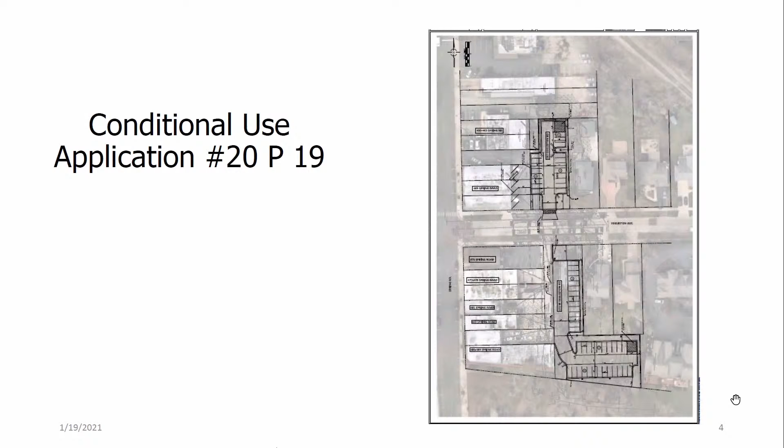This application involves Roberto's Ristorante and Pizzeria for a parking lot behind. They also own the multi-tenant office building and retail building at the opposite corner and are seeking a conditional use for parking lots behind that building as well. This is conditional use application number 20P19. You can see the two parking lots that we propose, as well as the relationship of those parking lots to the buildings on the frontage.

For the record, we've made sure that our address is in there as well as our logo. The ownership of the properties has been depicted in detail. They are color coded. These are multiple LLCs that are owned by the Moreci family, but everything there in the color code is a Moreci parcel of property. You can see that the two parking lots also involve multiple different zoning districts as well.

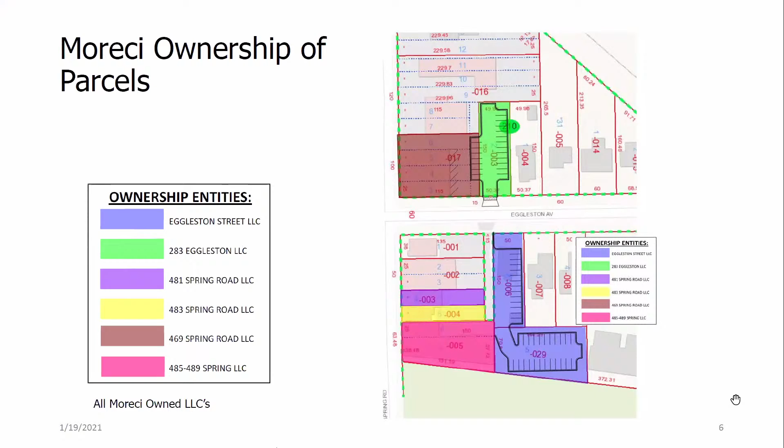This is a conditional use request. The applicant is requesting two separate yet directly related conditional uses. The requested conditional uses would permit applicant to construct and operate two surface parking lots immediately adjacent to two commercial buildings having frontage on Spring Road. Both of the parking lots to be constructed, as well as the commercial properties with frontage on Spring Road, are owned by the Moreci family.

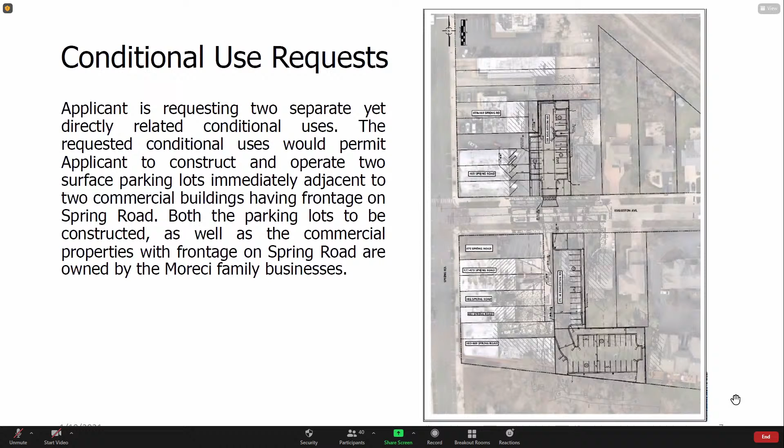The conditional use requests do not require any change in the zoning, nor do they require any variation or relief from any of the bulk regulations for any of the zoning districts involved. Rather, these conditional uses for parking lots are expressly permitted in each of the zoning districts established by the City of Elmhurst under section 22.242(3)A. We've cited that in full, but the relevant part is bolded, and it essentially says that parking spaces to serve office, commercial, or industrial buildings or uses may be located within 300 feet of such use if such spaces are located in an office, commercial, or industrial district, or are located in a residence district on a lot which abuts the office, commercial, or industrial district.

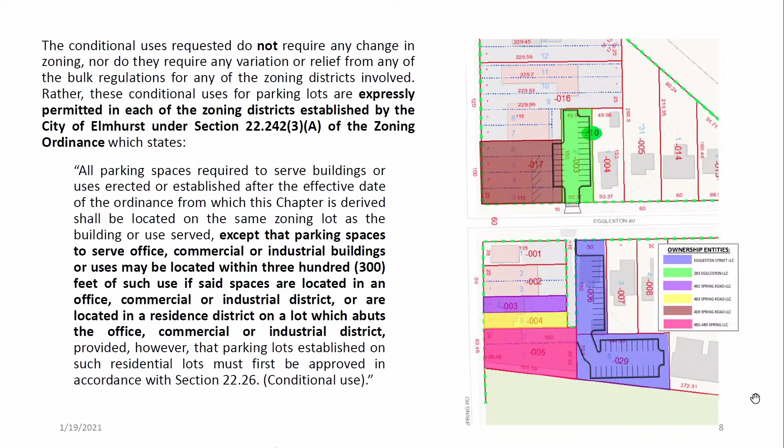And in this case, we have to file for a conditional use. This is a particular type of zoning. The distance that we are involved from each of the buildings has been measured, and this document has been provided to the city staff to be clear that we comply with this particular regulation. And since these are conditional uses, they are actually acknowledged as being permitted within the zoning districts assigned by the City of Elmhurst. Illinois case law of the Supreme Court holds that this fact constitutes a legislative finding that surface parking lots are an appropriate or compatible use adjacent to the single-family homes if they can fulfill the conditional use standards.

From a disclosure standpoint, the north parking lot is made up of two distinct lots. The main lot is lot 2 from a residential subdivision. There used to be a house on that approximately two decades ago that was demolished. Connected to that is a vacated 15-foot wide alley that the Moreci family purchased from the city several years back. Those lots, if we get the conditional use for this particular parking lot, will be consolidated, and the consolidation plat will be filed and recorded with the City of Elmhurst.

Similarly, the south lot is made up of two separate lots. Lot number 2 to the north currently has an old house on it that's been vacant for some time. And the southerly portion of the south parking lot is made up of part of what was once lot 8. Those two parcels will similarly be consolidated. We are not owners of the public alley that's adjacent to this particular parking lot, so that is not part of the consolidation plat.

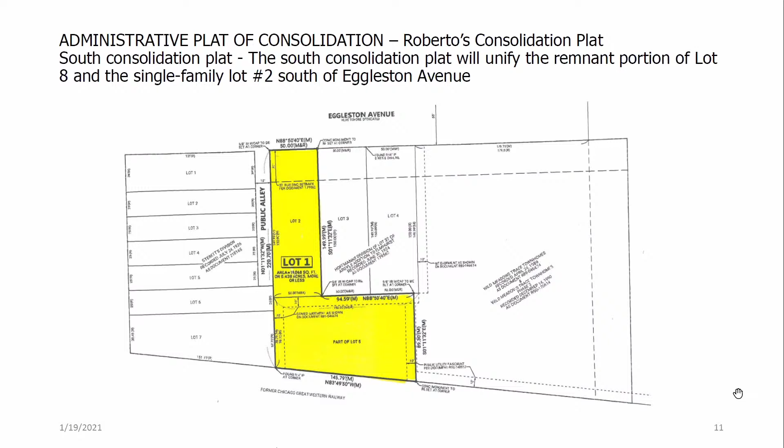Consolidation plats are a little bit different. These will be processed in a little different procedure. These consolidation plats will merge the currently separate lots of record into a single lot of record for each parking lot. This process is known as consolidation. This consolidation, because the lots are small, is done by an administrative process. Under the city code, consolidations that are less than an acre do not require a public hearing or a public meeting of the Plan Commission. These consolidation plats will be processed administratively by the city planning and zoning officials to make sure that we comply with all of the regulations. These consolidation plats do not require consideration or deliberation of the Planning and Zoning Commission this evening.

Our team is made up of many disciplines. Roberto's Restaurant is the owner of the property. They are the operator and main user of these two parking lots. Spaceco is our consulting and engineering consultant for this particular project.

They have done the site work and the layout, and they have also done the stormwater engineering. Bernanke and Associates completed the photometric study for this particular project to make sure that our lighting standards would meet all of the codes and would not leak over the property lines in excess of that which is permitted.

And KLOA, as our traffic and parking engineering firm, they have studied the area for parking deficiencies, and they have prepared and completed the traffic report as well as the supplement. Our firm name is listed as well.

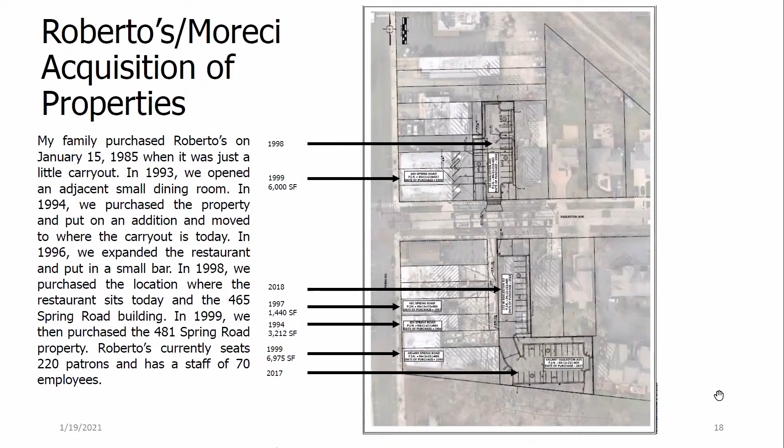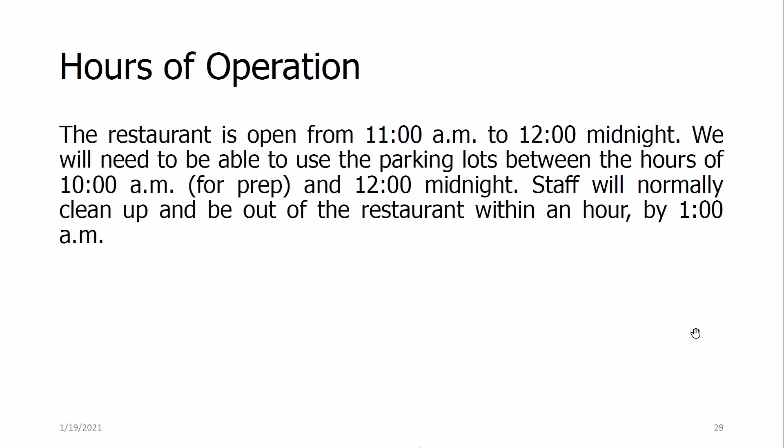Hours of operation - go ahead, Pasquale, if you'll address this. Sure, the hours of operation are open from 11 a.m. to 12 midnight. We will need to be able to use the parking lots between the hours of 10 a.m. for prep until 12 o'clock midnight. Staff will normally clean up and be out of the restaurant within an hour, by 1 a.m. if need be.

Roberto's and other business owners in the area are in great need of additional parking along Spring Road, especially north of the Prairie Path Lane. We have been urging the city to create more parking for years to make it more efficient and convenient for the patrons and businesses along Spring Road.

Addressing all legal and engineering requirements and the concerns of the neighbors has been incredibly expensive for my family, and it is occurring in an unprecedented and difficult year within the restaurant industry due to the COVID-19 pandemic. We desperately need parking to serve the needs of our customers, and on behalf of my family, we simply want this to be done in a transparent, professionally designed fashion without cutting corners.

Thank you, Pasquale. At this time, I would like to introduce our professional engineer from Spaceco. His name is Michael Mondas. We previously submitted information regarding his address and location. Mr. Mondas, would you please take it away with your testimony?

Yes, thank you, Scott. As Scott introduced, my name is Michael Mondas. I'm a principal with Spaceco Incorporated. I received a Bachelor of Science degree in Civil Engineering from Bradley University. I am a registered professional engineer in the state of Illinois and three other states that surround Illinois. I'm also a certified floodplain manager, and I have over 27 years of experience in site development engineering.

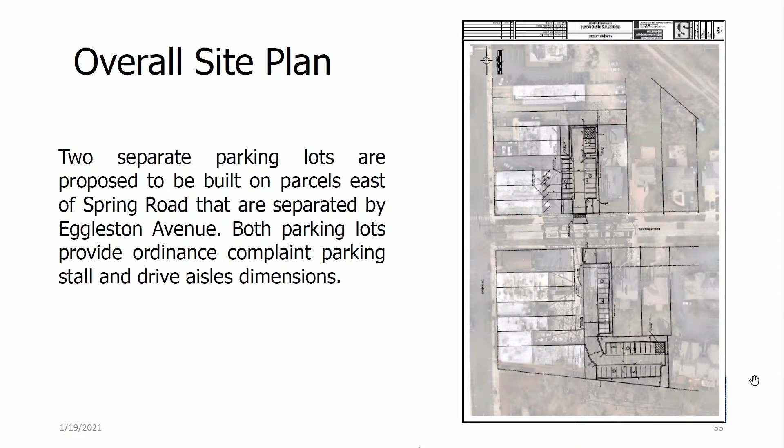Also, the drive aisle at the back of the building to the west will be reconfigured so that it is one-way, east off of Spring and south behind the building, and the parking stalls behind that facility will be angled. No setback from this parking lot to the property along the west property line, where it abuts the existing driveway behind the building, is being provided.

Fencing is also proposed along the east and north sides of the parking lot. It should also be noted that this layout represents a reduction of one parking stall from the initial site plan that was submitted back in October.

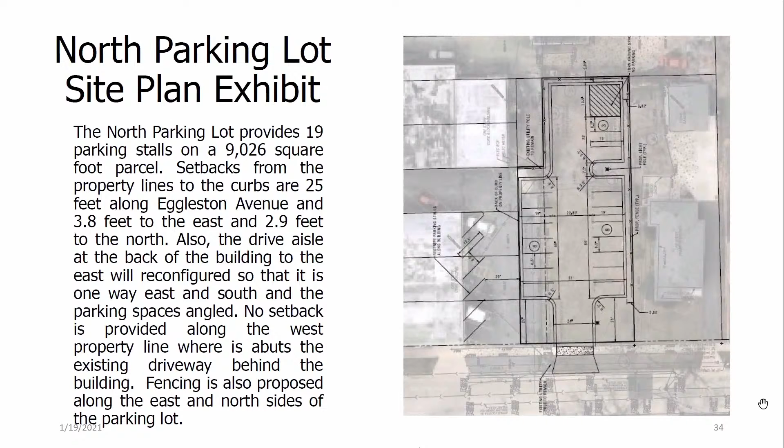This stall was given up to provide a space at the north end of the lot so that cars could turn around if they entered off of Eggleston and there were no spaces to park. They had the ability to do a turnaround at the north end of the lot.

Setbacks from the property lines to the proposed curbs along Eggleston are 25 feet, 5 feet to the east property line, and 10 foot to the north property line where this parcel abuts the rear of the existing houses to the east. The setbacks vary from 2.2 feet to 16.24 or 16.4 feet to the south where the parcel abuts the Prairie path. The parking lot directly abuts the existing alley to the west that's behind the current restaurant.

Fencing is also proposed along the east side of the lot and on the north side adjacent to the rear of the existing houses. The south parking lot is also provided an accommodation for a possible bike rack in the front setback along Eggleston. As with the north lot, the south lot also has a reduction of one parking space from the initial site plan that was provided, again, for a turnaround at the far east end of this lot.

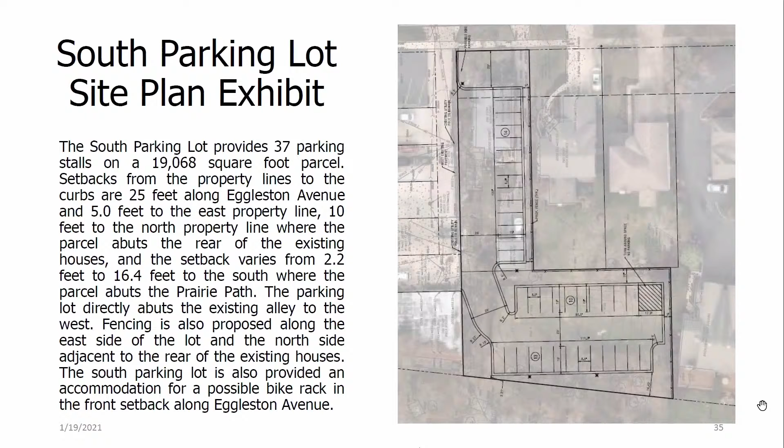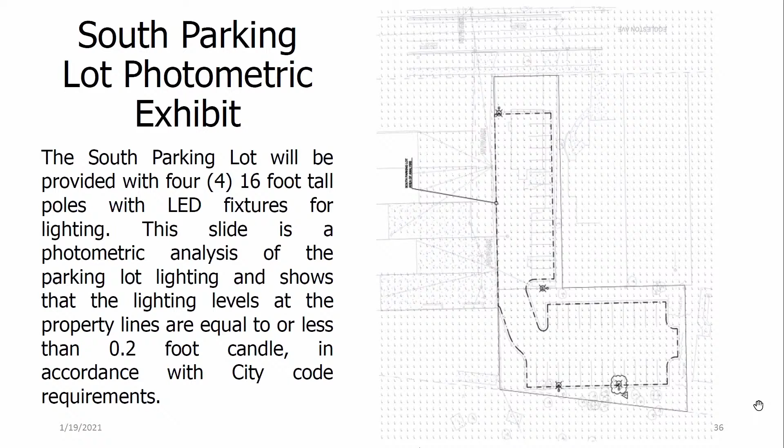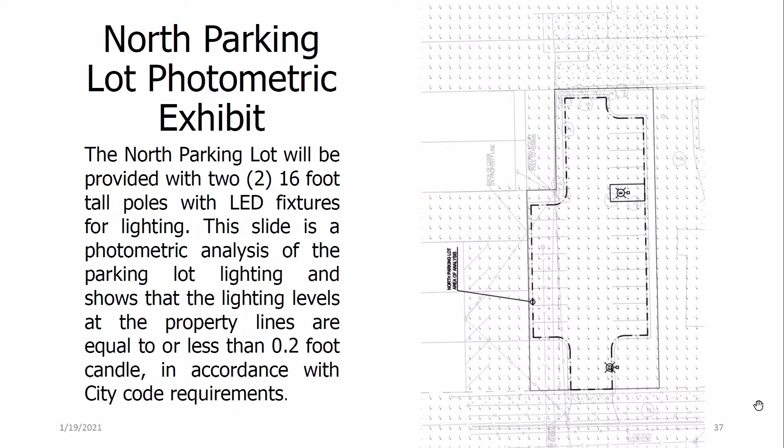This is, again, the photometric analysis for the north parking lot. Similar to the south, we have 16-foot tall poles, 2 of them with LED fixtures, again, representing that we have 0.2-foot candles at the property line in accordance with city code requirements. Next slide.

This slide shows the ordinance required setbacks for the north parking lot per the zoning ordinance. It's noted that the side and rear yard encroachments where the pavement of the parking lot encroaches into those setbacks where it's proposed, but those encroachments are allowed per the zoning code. The front setback along Eggleston Avenue is provided, which is 25 feet. Next slide.

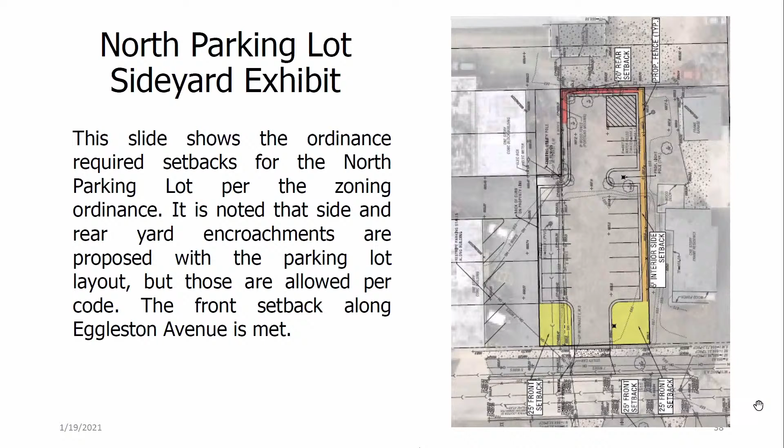This is again the south parking lot, shows the ordinance required setbacks for the south parking lot per the zoning ordinance. Again, all the setbacks are met with the proposed parking lot except the rear setback, and again that encroachment is allowed per code. Next slide.

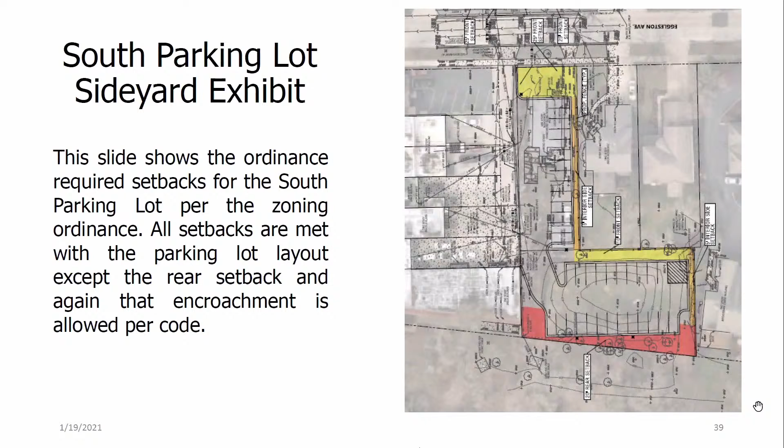The remaining portions of the lot will be paved with asphalt and concrete curbs. The proposed lot coverage percentage for the north lot is approximately 56%, and the south lot is approximately 35%, well below the 60% maximum that is allowed by code. Next slide.

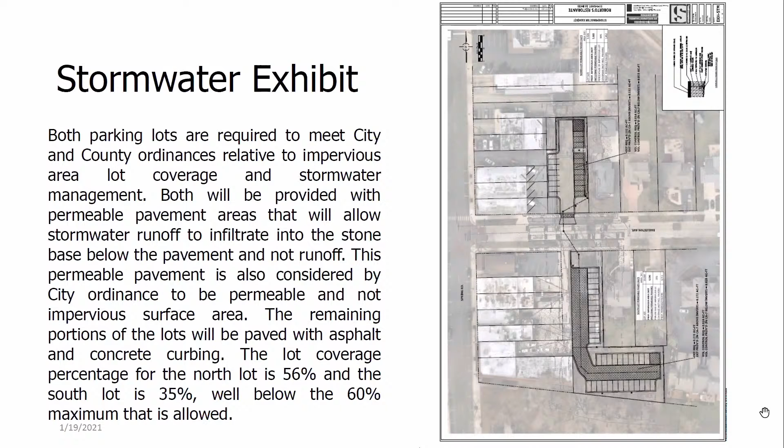Required stormwater for both lots will be provided in the stone base below the parking lot surfaces. The amount of storage to be provided within this stone base is equal to 100% of the expected runoff from the 100-year storm event. These stone areas will be provided under drain that will have a controlled release to the Eggleston Avenue storm sewer.

Additionally, a new storm sewer will also be provided along the east side of the north parking lot to provide drainage to an existing low area at the north end of the lot and on the adjacent lot to the east. This new sewer will be connected to the Eggleston Avenue sewer as well. Next slide.

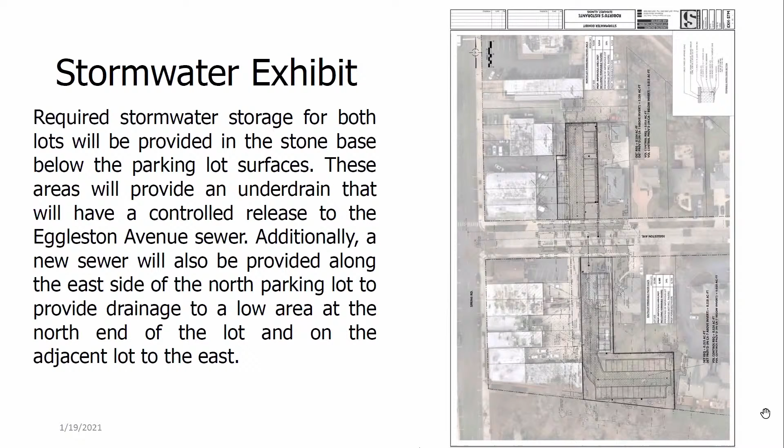This flooding and the city and county regulations relating to building construction and flood protection make the construction of any new homes on either of these parcels incredibly challenging, if not impractical. Any new structure would be required to have its lowest floor, including basement, at least 2 feet above the known flood elevation. This would preclude either of these houses from having a basement and would require that the houses be elevated to an impractical elevation that slopes and grading could not be reasonably achieved.

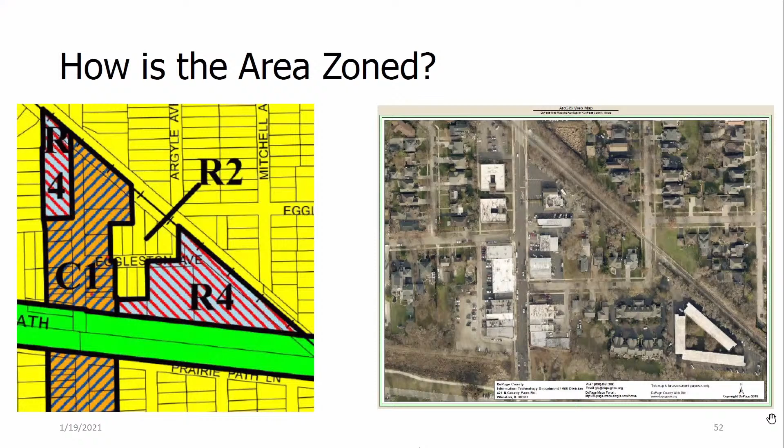The proposed north conditional use parking lot is zoned partially C1. That's the portion we acquired from the city for the vacated alleyway. The rest of the north parking lot is zoned R2.

The south parking lot also has split zoning. The north half is currently occupied by a long vacant house zoned R2, and the southerly portion is zoned R4, medium density multifamily residential. This is an unusual zoning pattern, pronouncedly mixed use, and has been for decades.

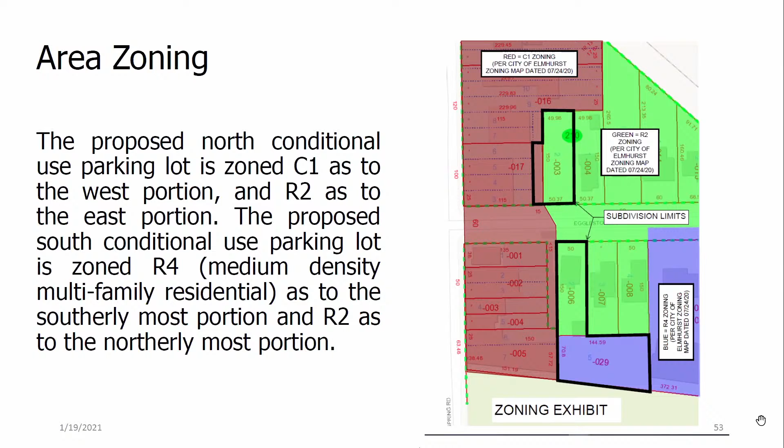The area of the two proposed accessory parking lots presents a well-defined and notoriously persistent mixed-use pattern that was partially created by past zoning decisions of the city and partially driven by outside forces, including a court of law.

The mixed-use zoning shows where the parking lots fit in, and on the southerly lot you can see a portion zoned R4. To the east of that is the townhome development, and to the east of that is an apartment complex.

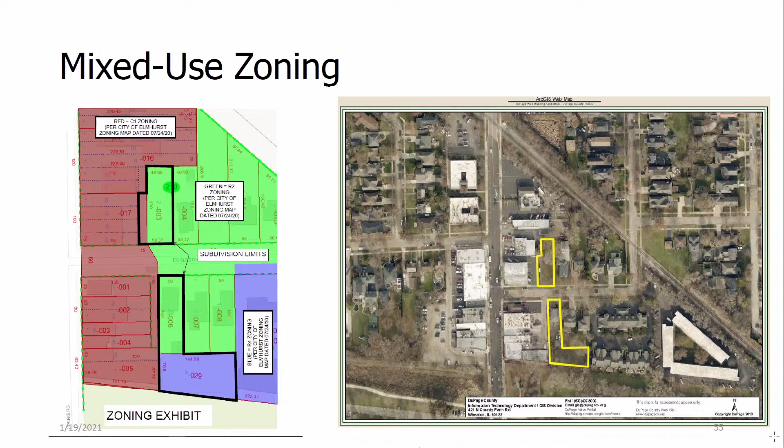The R2 zoned island reveals a total of 8 lots with R2 single-family zoning. This island is surrounded by R4 high-density multifamily zoning and C1 local shopping district. The isolation of this R2 zoning is further cut off to the northeast by a diagonal raised-grade industrial spur line.

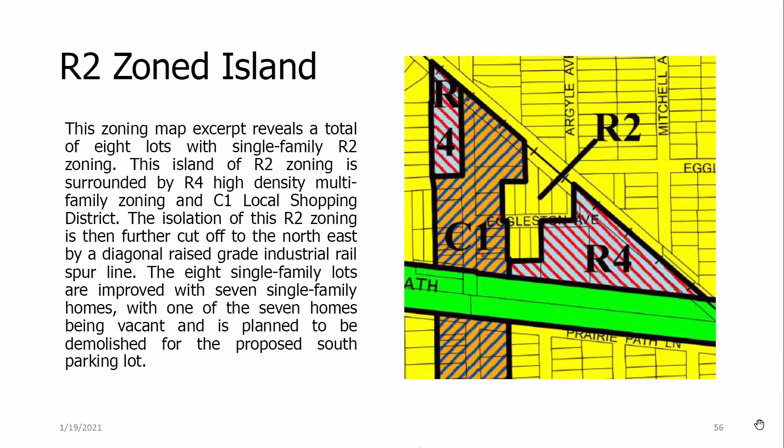The 8 single-family lots are improved with a total of 7 single-family homes currently. One was demolished about one to two decades ago, and one of the 7 homes is vacant — that's the one we propose to convert to a parking lot.

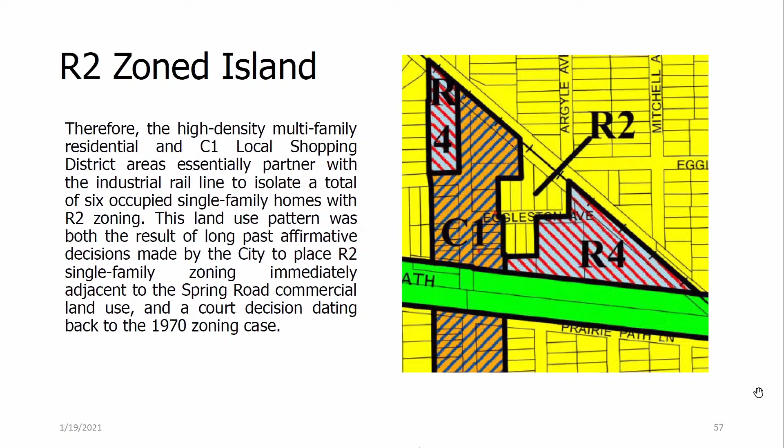The high-density multifamily residential and C1 shopping district areas essentially partner with the industrial rail line to isolate a total of 6 occupied single-family homes with R2 zoning. This land use pattern resulted both from long past affirmative decisions made by the city to place R2 single-family zoning immediately adjacent to the Spring Road commercial land use, and from a court decision dating back to a 1970 zoning case.

Prior to 1970, the Spring Road commercial land uses were using the rear of their lots to park vehicles and store garbage dumpsters, with access provided by a city-owned 15-foot wide commercial alley. The alley and commercial parking areas were immediately adjacent to single-family homes on both the north side of Eggleston Avenue as well as the south.

As of 1970, this mixed-use pattern was established by the land uses as well as a long historical pattern. Based on information from Eileen Franz, this subdivision dates back to 1915 — approximately 15 years prior to the Euclid decision, which essentially fostered contemporary zoning. So the age of this subdivision predates even the existence of zoning, and it existed from a time when the Prairie Path was essentially a rail line.

As of 1970, Spring Road frontage was solidly retail commercial land use. Parking for Spring Road frontage was to the rear of the buildings and on street. A publicly owned alley provided vehicular access to parking and to the service and garbage removal portions of the commercial buildings. Single-family homes were immediately adjacent to the alley and parking lots for the commercial buildings fronting on Spring Road. Large multifamily use was to the east, and a commercial florist was in the center.

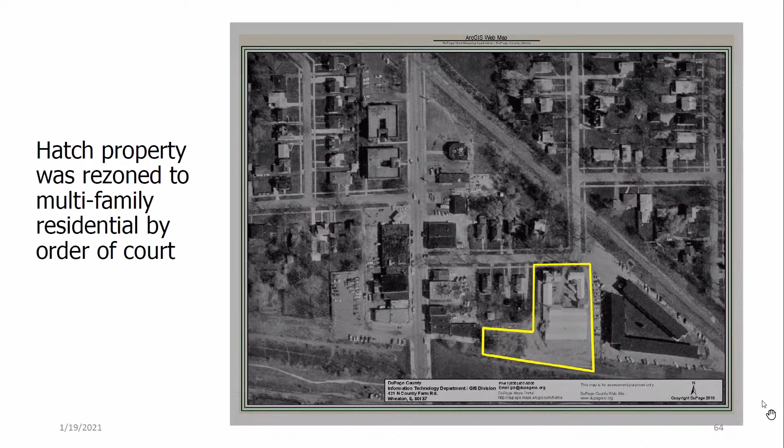The court entered a judgment order which zoned the Hatch property for multifamily development in 1970. The Hatch property, which includes the area we propose to use for a parking lot in part, was rezoned to multifamily residential by court order. That's where the multifamily came from.

The judgment order specifically said that no structure could be erected on the remnant parcel - that's the part we want to build a parking lot on. The court order restricted it to anything other than surface development. Section B says the front yard for the area we want to use for surface development shall be reduced from 25 feet to 10 feet, solely for the purpose of permitting maintenance of parking, including surface thereof, as close as 10 feet from the south line of lots 2, 3, and 4. That was the order the court entered.

In early 1990, the property was still vacant. An application was filed with the city to obtain a variance for the 1.56 acre property subject to the 1970 zoning case. Frank Casey and Chris Nicholson of L&N Development Company requested a variance to permit 2 separate townhome buildings on the property where only a single townhome building was permitted, and proposed to restrict the development density to 13 units rather than the 42 units authorized under the 1970 zoning case.

In 1990, the zoning was agreed to by the City of Elmhurst. This went through a process involving the Plan Commission and City Council. There was a presentation made associated with this requested modification. It was agreed to by City Council, and the city entered an agreed order in 1990. This agreed order included the same provisions on the R4 parcel of property that we propose to build a parking lot on.

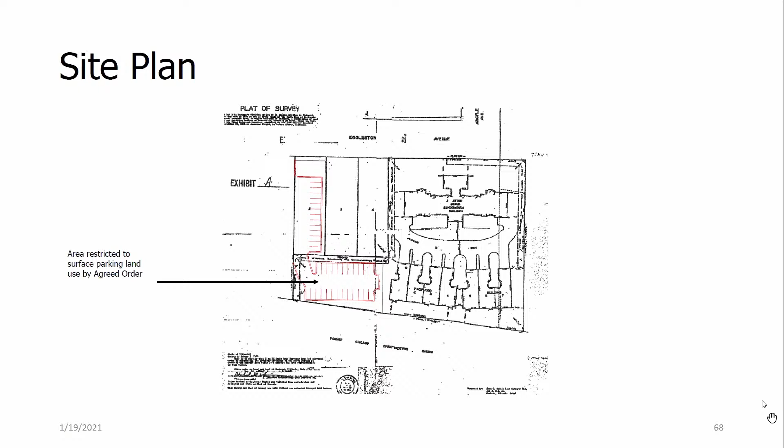You can see that the R4 portion that we're proposing to build on is the portion that was restricted by that agreed order.

Then with the 1990 agreed order zoning in place, the townhomes developed. Thus, both the initial purchasers and any subsequent purchasers of each of the townhomes made their residential investment at least legally charged with the knowledge that the land immediately west of the townhome development was zoned for multifamily development, but restricted to being used for surface parking by a court order agreed to by the city of Elmhurst.

On this slide, I want to make one modified disclosure. I spoke with one of the residents from the townhomes today. They recently moved in within the last year, and they were not aware of this particular restriction - they hadn't investigated the zoning and didn't know of that. When I say they were legally charged with it, property owners purchasing property are fundamentally charged with the knowledge of how the city has zoned and planned the area. So when I say they're charged with the knowledge, I acknowledge that some people wouldn't investigate this and may not have known when they made their investment.

Additionally, there were some houses built immediately north of the R4 parcel - one is 270 Eggleston, another is 266 Eggleston. These properties are also adjacent to the area that was restricted in 1970 and re-restricted in 1990. Both of these homes were developed after that zoning was placed.

Thus, both the initial purchasers and any subsequent purchasers of each of the two new single-family homes at 270 and 266 made their residential investment, once again, legally charged with the knowledge that the land to the south of their home was zoned for multifamily development, but restricted to surface parking by a court order agreed to by the city of Elmhurst.

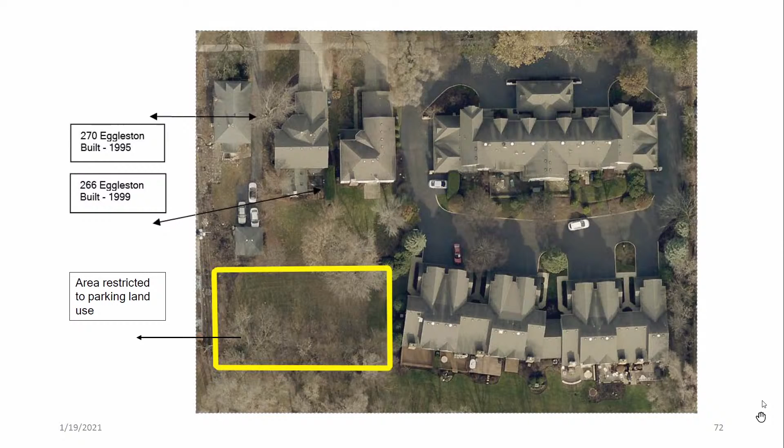That's the way the zoning developed. So you've got a mixed-use pattern. I've done enough work in the city that it's unusual to have mixed-use patterns such as this. They don't spring up every day. I think the historical development of this area gives rise to how it came about.

Recognizing that, your professional planning team has developed the award-winning 2009 comprehensive plan, recognizing how the general area we're dealing with is zoned for mixed-use land and how the persistent mixed-use zoning pattern came into being. How is it that the city of Elmhurst formally planned for the future development of this mixed-use area? What have the previous plan commissions and previous city councils defined as the future public interest at this location? The 2009 comprehensive plan expressly states one of its goals: community subareas.

The new comprehensive plan focuses on 9 community subareas. These locations are comprised of primarily non-residential land uses, generally located along highly visible transportation corridors and gateways, as well as within the city's neighborhood commercial shopping areas. As a mature community with very few new areas for development, the plan seeks to leverage economic development possibilities from these locations while ensuring stable and compatible land use relationships with adjoining areas. That was one of the major goals of this 2009 plan, these sub-areas.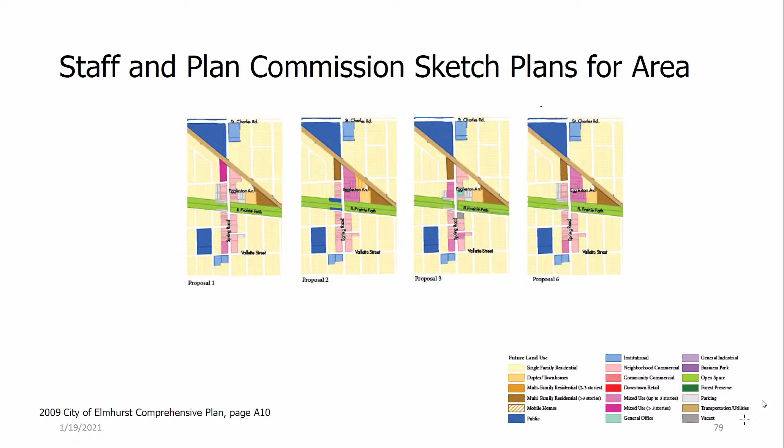This is proposal 1, the Staff and Plan Commission sketch plan for the area. It proposed that all 3 of the single-family homes, as well as the Old Fort parcel, be converted to parking.

This slide anticipated that the mixed use would be extended and replace the single-family homes, both that we proposed to construct parking lots on, as well as 3 of the single-family homes for mixed-use development.

This slide showed maintaining the residences to the north, but replacing the single-family homes on the south side of Eggleston with parking in the last plan.

This plan showed the expansion of commercial even further into the project adjacent to the existing townhomes. These were the Staff and Plan Commission sketch plans that led to the recommendations provided as part of the comprehensive plan.

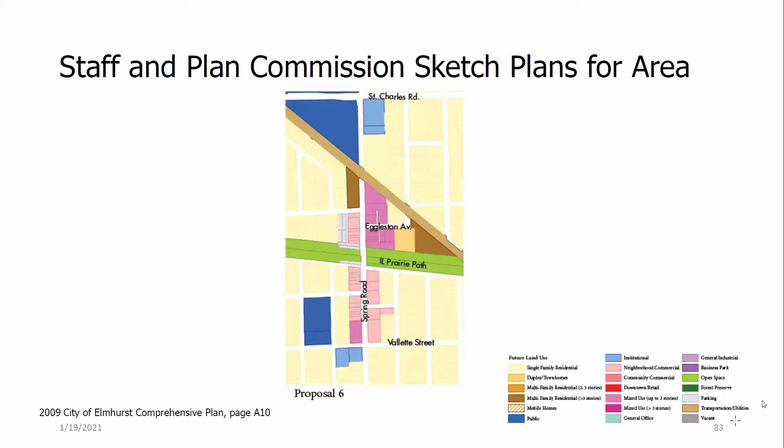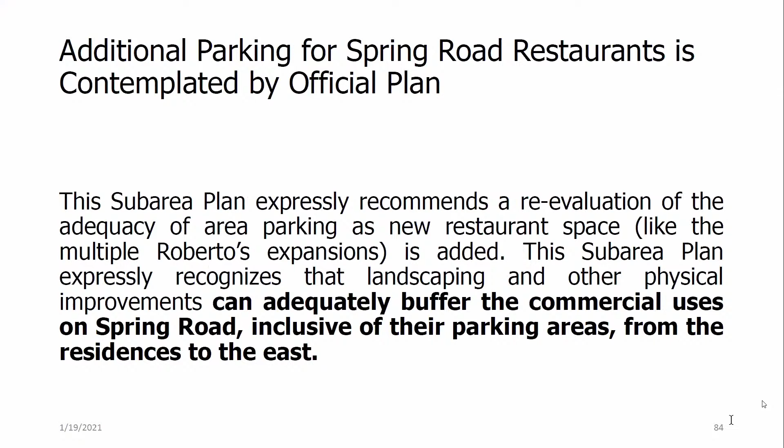In summary, the City of Elmhurst has specifically planned the property proposed for these conditional use parking lots, with very consistent and repeated recommendations from the city staff, the Plan Commission, and City Council through the adoption of the comprehensive plan. The plan expressly recommends: one, new parking should be constructed as needed in the area.

Number 2, the area north of the Prairie Path should transition to either commercial, mixed use, higher density residential, or parking for the commercial properties on Spring Road.

C, use of landscaping, berms, or other improvements can provide adequate buffering between commercial uses, including parking, and adjacent houses. And D, additional lots along Eggleston Avenue could be converted to parking for the commercial uses along Spring Road, including Roberto's.

Now, the reason I point this out is that the comprehensive plan is the active guide that is supposed to guide land use decisions of City Council.

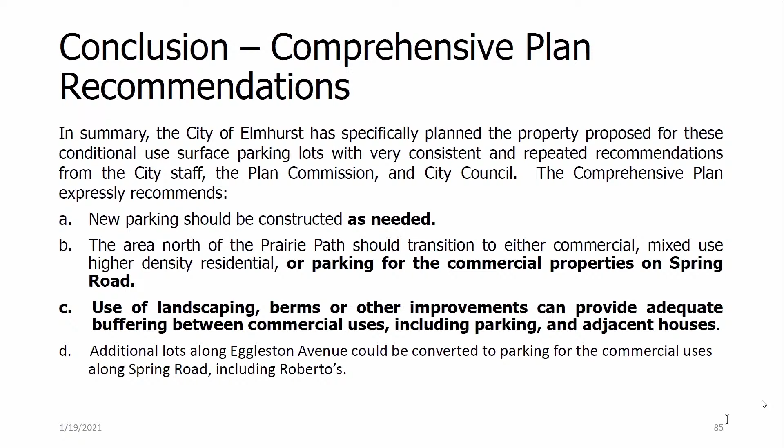It is supposed to provide guidance to the Plan Commission for the recommendations they make on petitions that come before them. But more importantly, it's also supposed to guide the owners of property in the area and the parties who are purchasing property with the idea that they're going to present those properties to the city for conformity with the planning criteria that they have adopted.

The neighborhood outreach meeting: it should be noted that the applicant conducted a neighborhood outreach meeting about 6 months ago and invited all the neighboring owners through their attorney, William Graft, and the alderman and city staff, both at the meeting and since.

The Moreci family has repeatedly sought input and direction from the neighbors to determine how they would like to see the yards and parking lot landscaped, how they would like to see them screened, what lighting controls they would like to see put in place, how they would like the fencing structured, so as to ensure that the design submitted will provide the adequate buffering mentioned in the Spring Road Business District Sub-Area Plan.

Simply put, buffering, screening, and code-compliant lighting will be installed in both of these parking lots. But we don't want to, and have not wanted to, be presumptuous and simply say we're going to design the screening that is intended to serve you. We have sought input from the neighbors.

We were very pleased to get some input and feedback from neighbors this evening at what we thought was a very productive meeting. We hope to get more of it in the weeks that come.

But these issues are not as simple, and they're not black and white. Fencing can be 100% opaque. If you go south along Spring and look at the parking lots behind the commercial properties on South Spring that are immediately adjacent to single family homes, drive that area associated with the next street to the east.

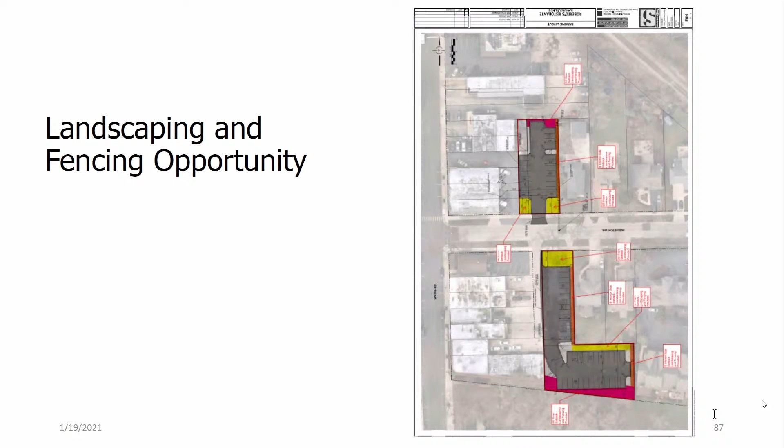Next exhibit. At this opportunity, our witnesses are available to answer your questions. We once again reiterate that we would like to have our application and the text address the standards for us in writing. And at this time, we turn it over to questions from the commission, however you would like us to proceed, Madam Chair.

Okay, thank you very much. I will now entertain any questions from commissioners. Commissioner Burns, and then Commissioner McCoy, and then Commissioner Snyder.

Thank you, Chair Rose. I have questions for Mr. Mondes, Mr. Abuna, and for Mr. Day in that order. I'll start with Mr. Mondes, Michael Mondes. My first question was about fencing, but I think Attorney Day addressed that, so I'll skip over that.

With the parking lot lighting, it was described as LED lighting. Could you further describe it? Will it be designed, as much as possible, to keep the light on the subject site and away from neighboring properties? Yeah, that is correct. We're proposing to use LED fixtures which have a flat lens on the bottom, so the light is directed down as much as possible. In the old days, you used to have lenses that would bulb down, and then they'd put cut-off shields. But with LED fixtures, they're a flat lens, and the light is directed down.

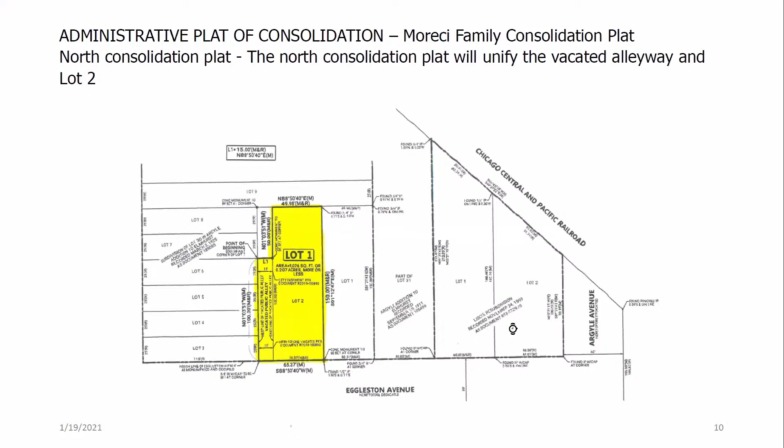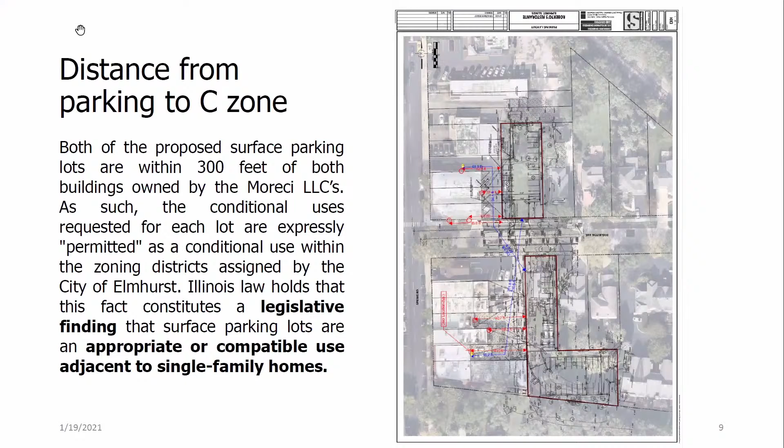There you go. I don't know if we can expand this or not, but this is the exhibit by which we did all the dimensions, and you can see they cross between the two buildings with the blue lines. I can't quite zoom in to see, can you read the dimension for us? The right of way, I believe, is 66 feet. And the dimension you're looking for is 300. So the exact dimension from the parking lot to Roberto's is 300? It's within 300, it's within 300.

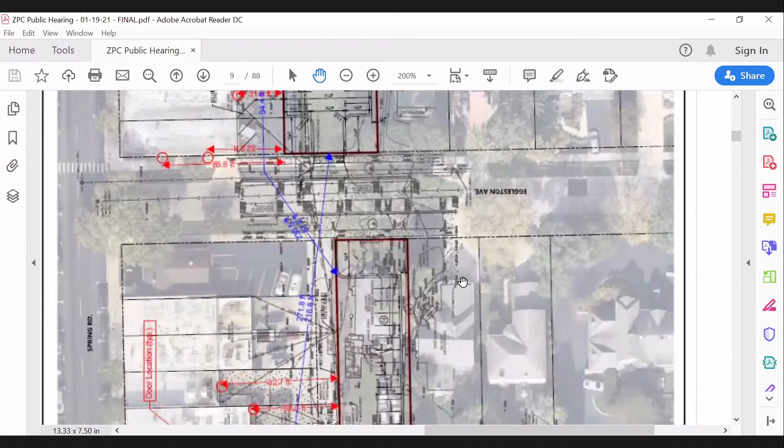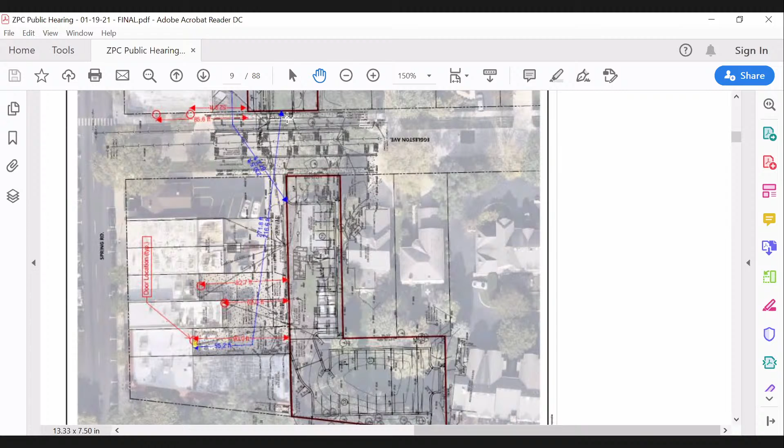Okay, it looks like it is 271.8 feet. Is that right? Yeah. And that is from the property line to property line. That is the dimension from the right of way at Eggleston to the back door of Roberto. Okay, thank you.

And I just have a follow-up question on that. Would you expect people who park in either one of those lots to come around to the front door, or use the back door? What is the expectation of that? They would be able to use the back door if they like. Like I said, that door will be changed. Right now it's just an emergency exit door. Most likely they would walk around to the main entrance, so Eggleston to Spring and then Spring over.

Okay. Would you have any plans, I know this is a little crazy since we just talked about valet parking, about offering valet parking at all again, or if you get these two lots, that's the end of it, you would never do valet parking? People could just park on their own. Right, they could park on their own. I mean, valet parking would be great if we would have something that would work for us. But at the moment, it would just be for themselves.

All right. Any other questions from commissioners?